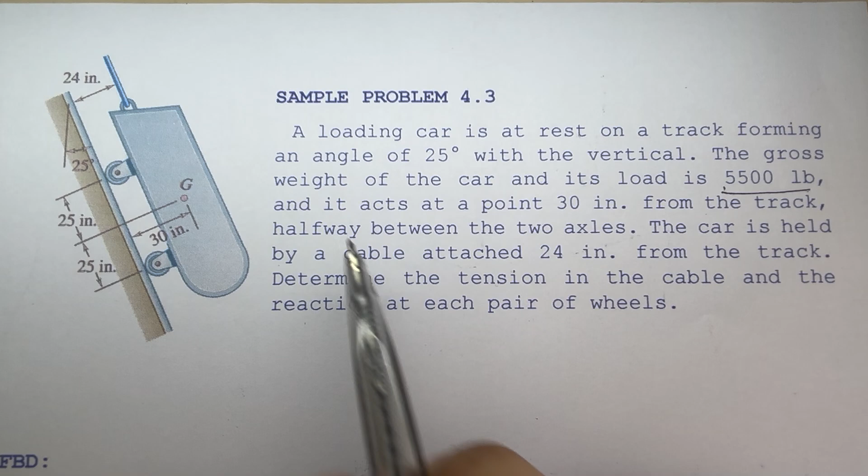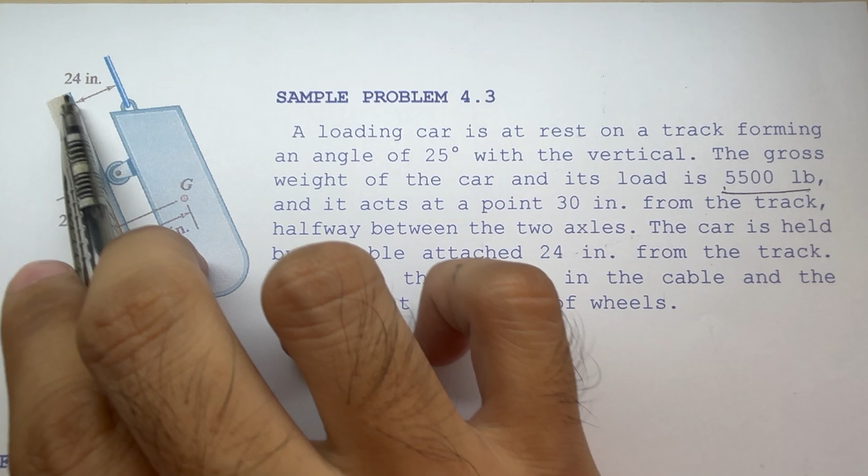And it acts at a point 30 inches from the track. So the distance from here going here, we have 30, halfway between the two axles. The car is held by a cable attached 24 inches from the track, so we have a cable here and its distance from our track is 24 inches.

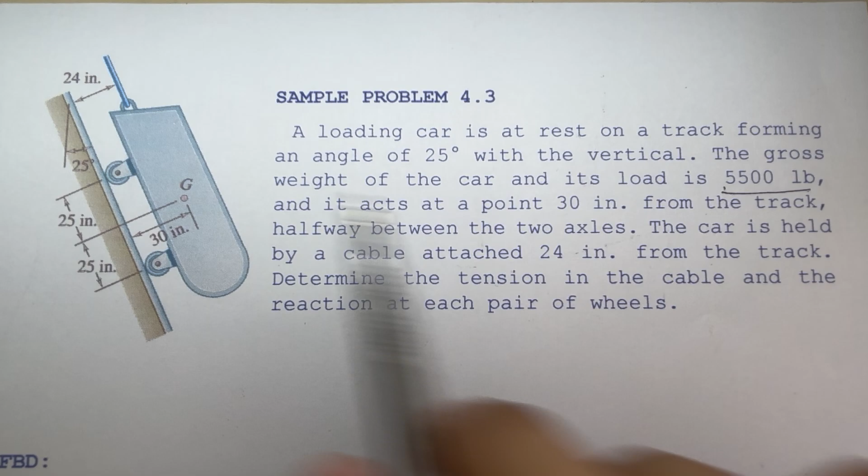Determine the tension in the cable and the reactions at each pair of wheels. So what we have here is a cable at 24 distance from our track, and the center of gravity is located 30 inches from this track.

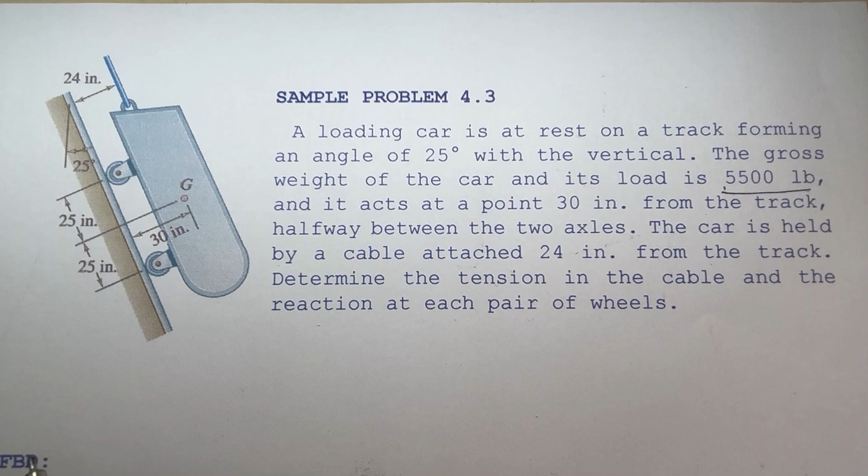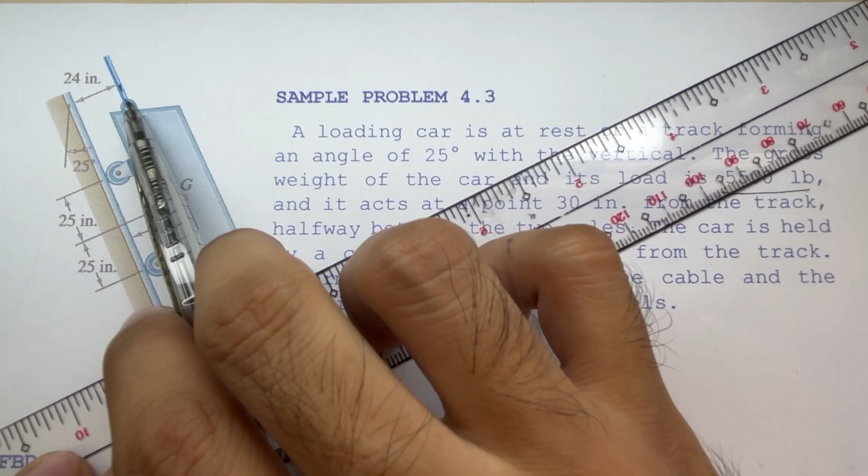As we look at the picture here, if we try to trace the line of action of the force exerted by the cable, this line here, we know that the force exerted by the cable is in tension and it's along its line of action, or along the cable.

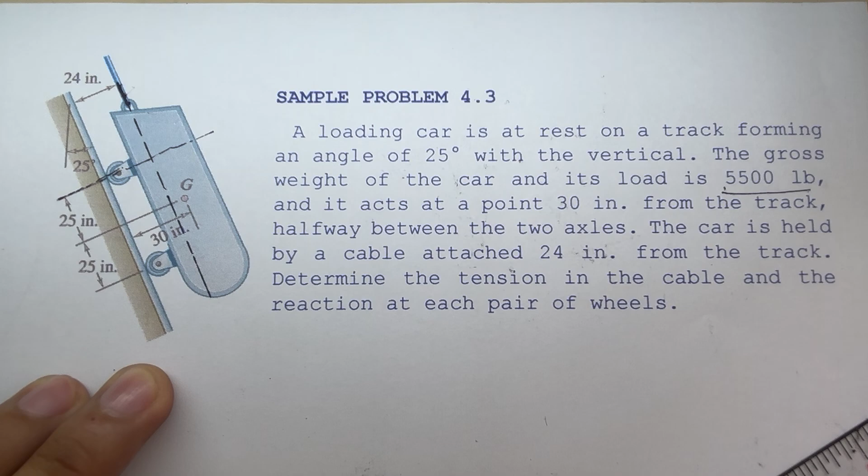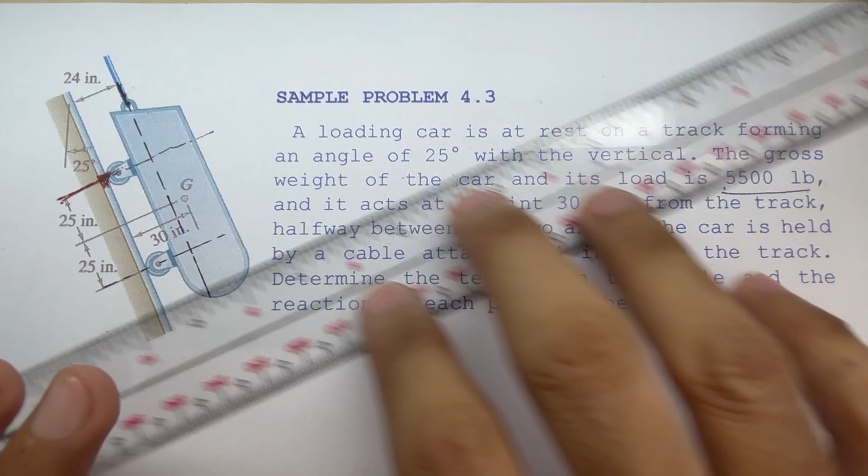How about these wheels? If we trace its line of action, the force exerted by the ground on the wheel is somehow directed towards that direction. The same goes with the other wheel here, going to that direction. Our cable is somehow directed towards that direction because the cable is always in tension.

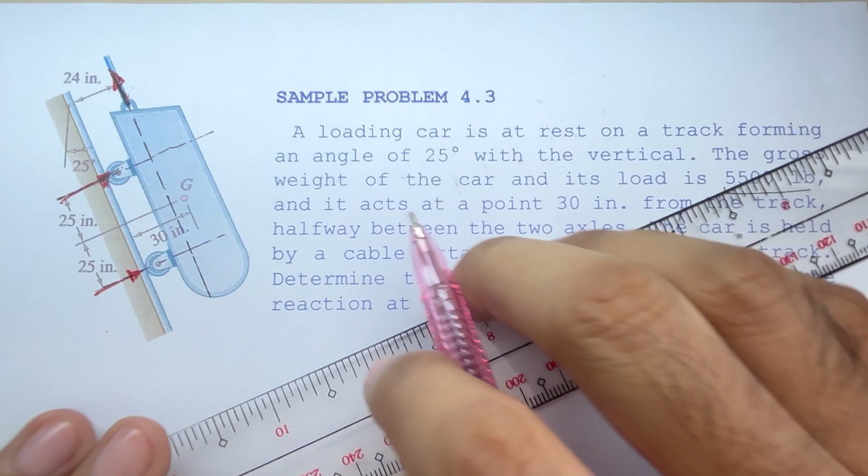And our gravity here is always vertical, down, and it is at 25 degrees from the vertical. So if we try to trace this angle here, that would somehow look like that one.

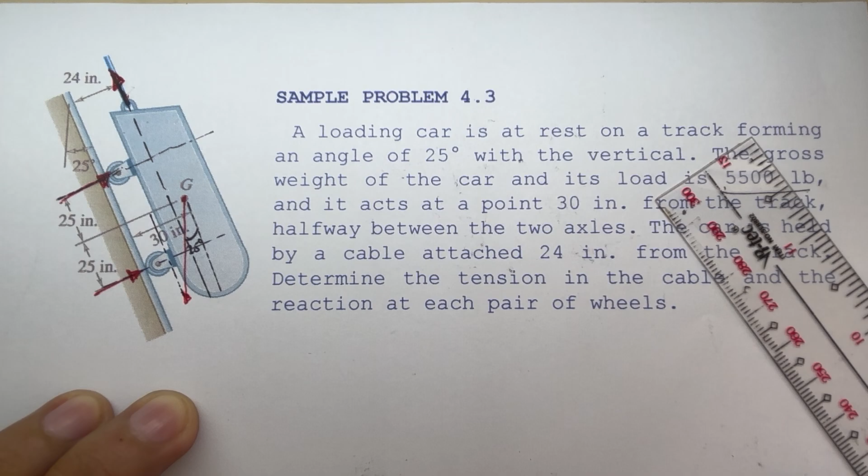As you can see here, our weight can be resolved into components. If we set our components as this one here, going downward as our positive x-axis, and towards that direction as our positive y-axis, our weight here can be resolved into x and y components. So the component of our weight is somehow this one here and that one there.

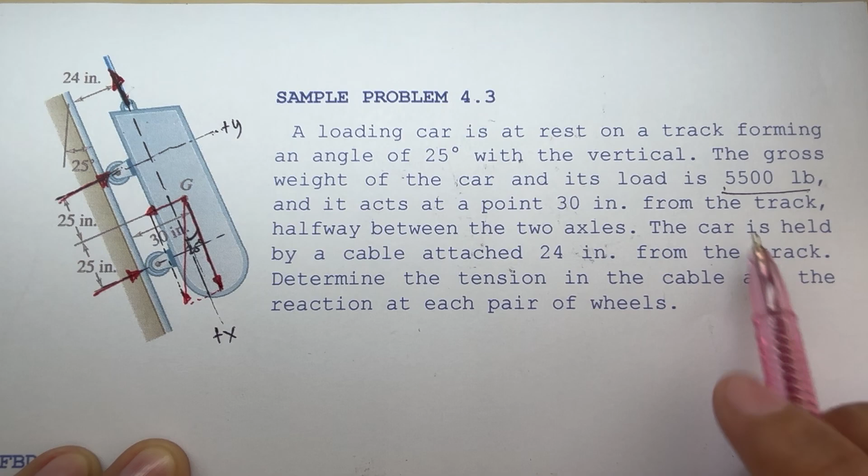So its component, since the magnitude of our weight is 5,500 pounds — the component along x-axis is 5,500 cosine 25, because the angle is adjacent. Along y, we have 5,500 sine 25, and since it's directed towards the negative y-axis, this should be negative.

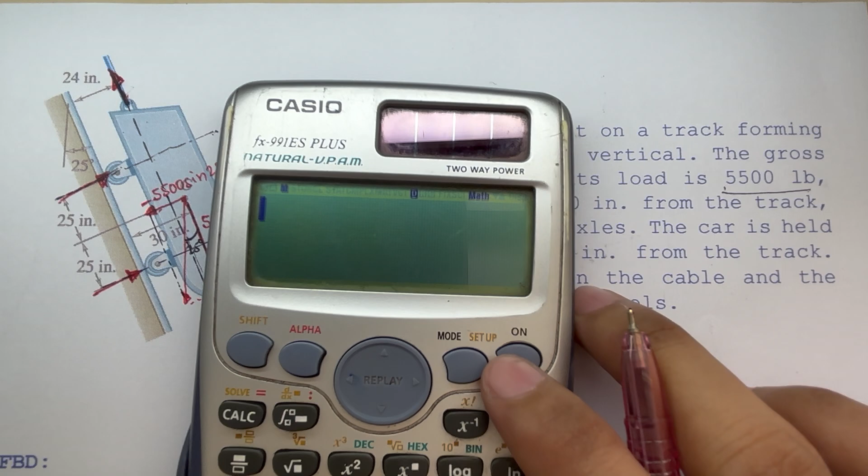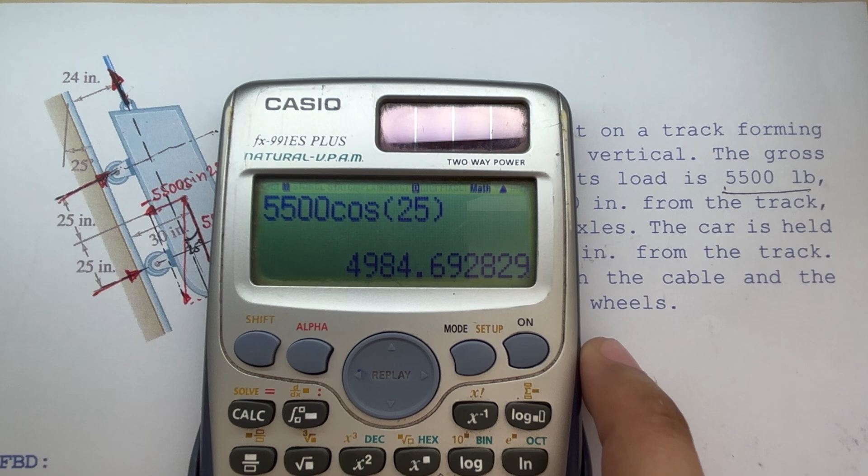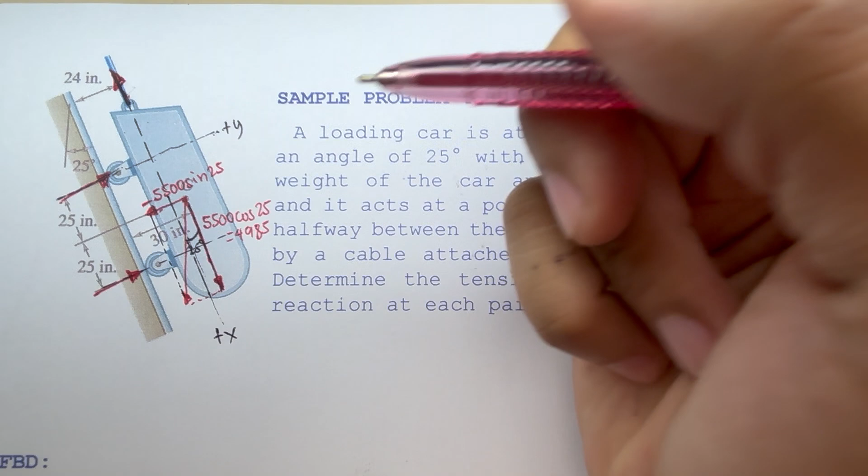So if we try to solve for the components, we have 5,500 cosine 25. We have our x component as 4984 or 4985. For sine, we have 5,500 sine 25, which gives us 2324.

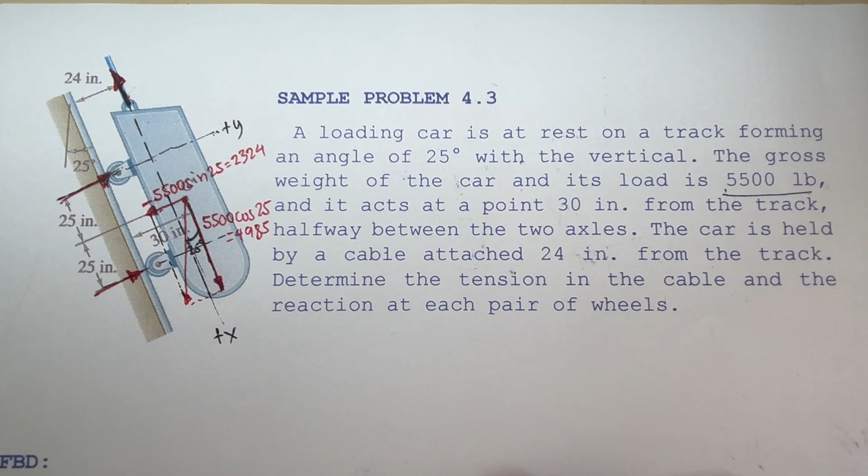So if we try to redraw or make an FBD of this figure, somehow it would look like this one. From the book, instead of having 4985 here, we have 4980, and instead of 2324, we have 2320. So if we follow our book, using the same values, we have here 2320 and 4980.

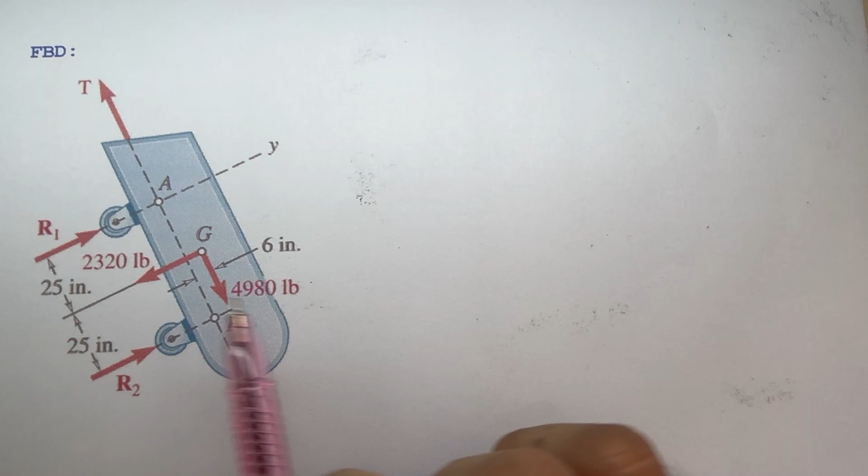So having this FBD, what we need to do next is apply the three equilibrium equations. From our equilibrium equations, we can use summation of forces along x, summation of forces along y, and summation of moments at any point. And we can replace any equation by a summation of moments.

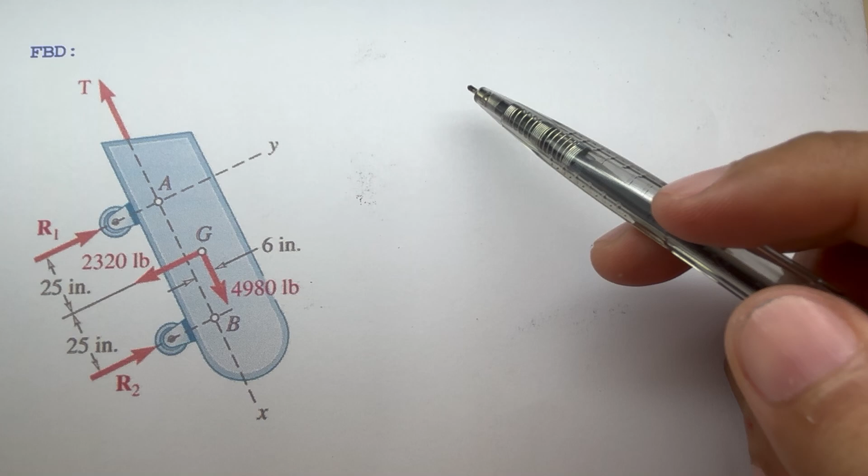So say for example, let's try first using summation of moments. One technique here is to apply summation of moments at a point where there are a lot of unknowns. So looking here, at point G, 2320 and 4980 are not unknown.

At point A here, by principle of transmissibility, we can move this R1 here to this point. And this tension here, by principle of transmissibility, we can move it here too. So we know that R1 and our T here are both unknown, so we can use this point to apply our summation of moment equal to 0.

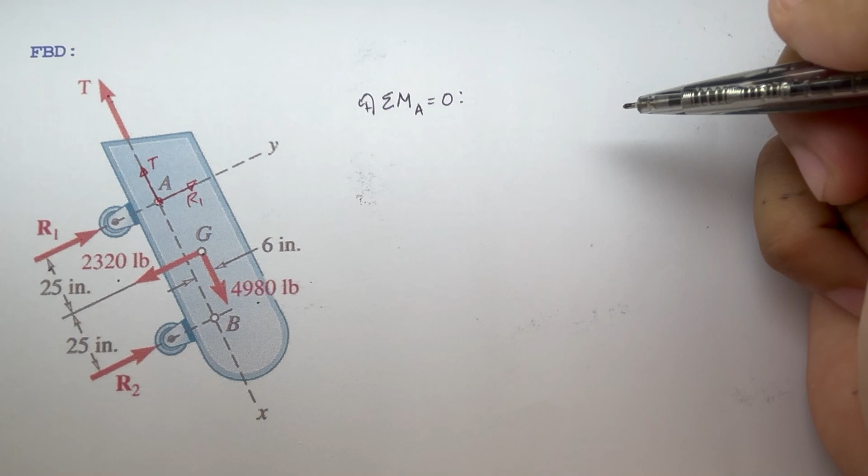Let's try summation of moment at point A equal to 0. So what are the moments? T and R don't have any moment at that point because they have no moment arm. So what we have here is our weight and the reaction 2.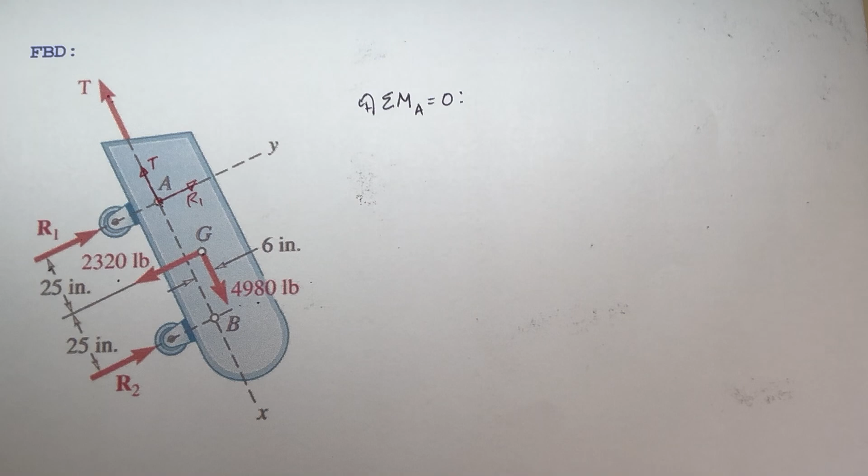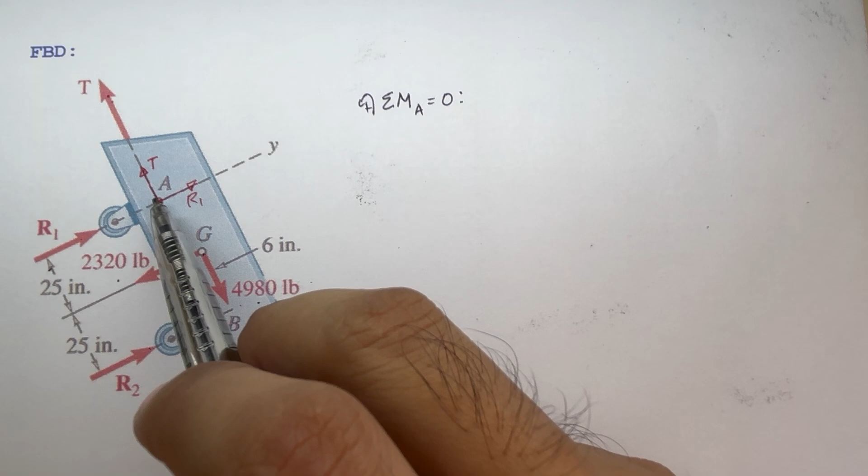For reaction 2, by principle of transmissibility, we can move this one to point B. So its moment arm is the distance from point A to B here. So our force R2, its moment arm, we have this distance: 25 plus 25, we have 50.

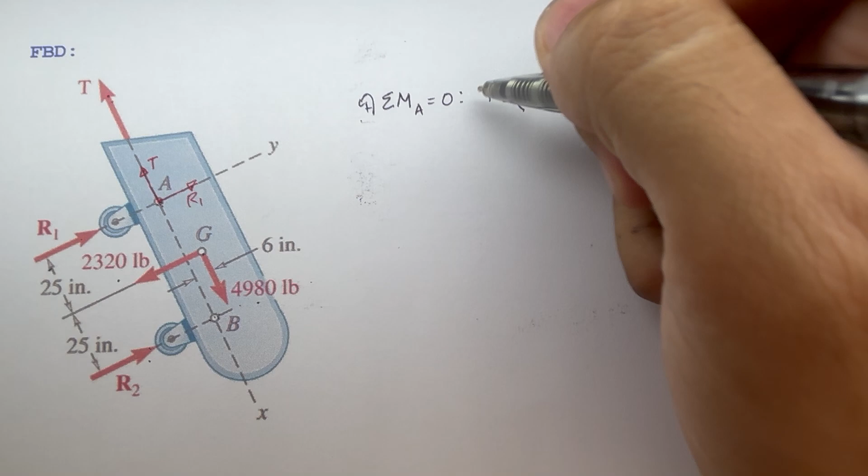And at point A, this force would tend to rotate counterclockwise, so counterclockwise means it's positive. Then we have about this 2320 - it tends to rotate this one clockwise, so therefore it's negative. Its moment arm is the distance from point A going perpendicular to this one - we had 25.

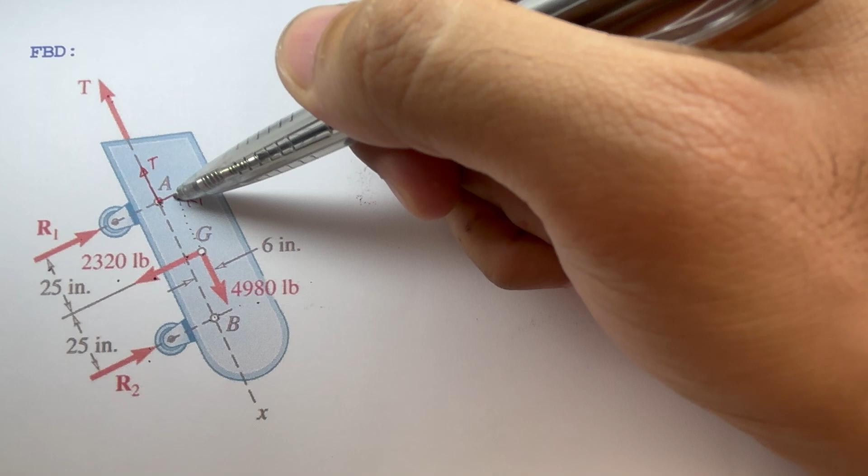Lastly, we have this one. By principle of transmissibility, we can move this force to this point. Now it has a distance - here we have 6. So we have the moment arm 6 and the force is 4980. So 4980 times 6, and it's clockwise, so it should be positive. This is equal to 0.

So solving this, we have our R2 equal to 1758 pounds. Since we have a positive answer for R2, our assumption that R2 is directed towards that direction is correct. Let's box this one here.

Next, let's try summation of moments at point B, positive counterclockwise equal to 0. So what are the moments at point B? We know that R2 has no moment at point B, and our tension has no moment at point B. The forces that have moment at point B are only R1 and these two here, the components of our weight.

So let's solve. We have R1, the moment arm is 50. We have then 2320 - by the way, we have R1. If we have the moment pivoted at point B, this R1 would tend to rotate clockwise, so therefore this should be negative. How about 2320? At point B here it would tend to rotate counterclockwise, so we have positive, and its moment arm, the perpendicular distance, is 25.

Then lastly, since we already know R1 and R2, the only force left unknown is tension, and our tension here is along our x-axis. So we can apply summation of forces along the x-axis, wherein going that direction is positive, equal to 0.

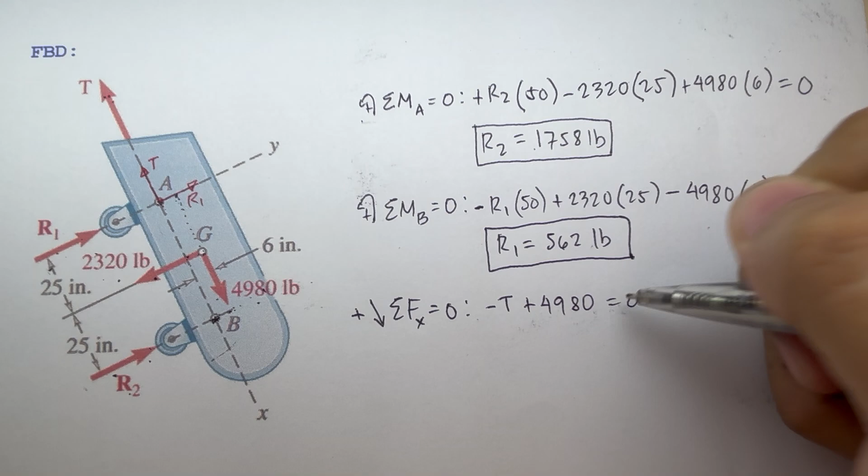So we have here our forces. We have our tension directed towards the direction is negative T. And another force that is along our x-axis, we have 4980, and it's positive, 4980, that is equal to 0. Therefore, our tension here is equal to 4980 pounds.